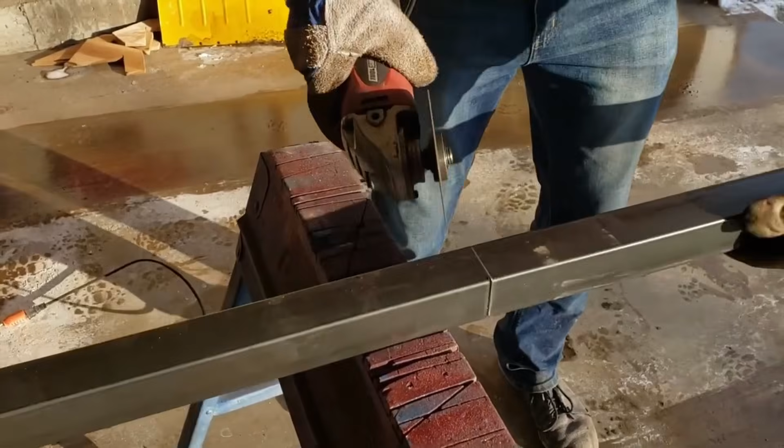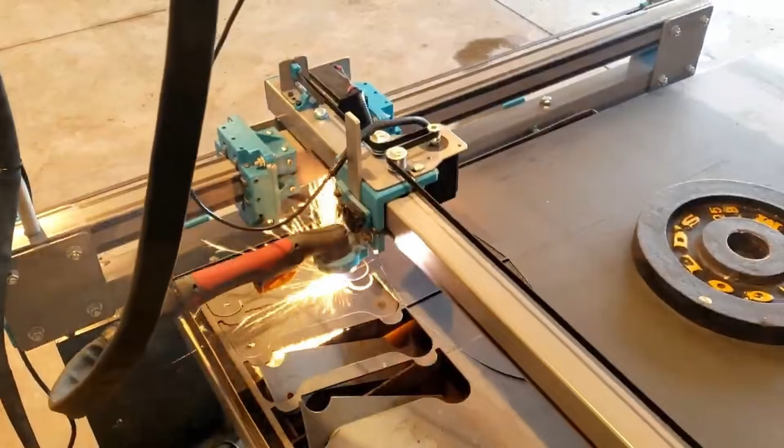These builds are meant to be built at home with simple tools, and any complex parts are taken care of with a 3D printer. We have a variety of different builds that should meet just about anyone's needs. All of our builds can be done for under $1,000, and some of them in the $200 to $300 range.

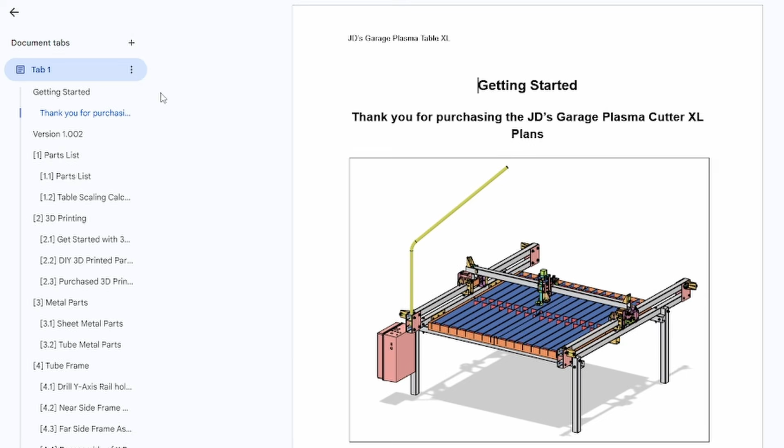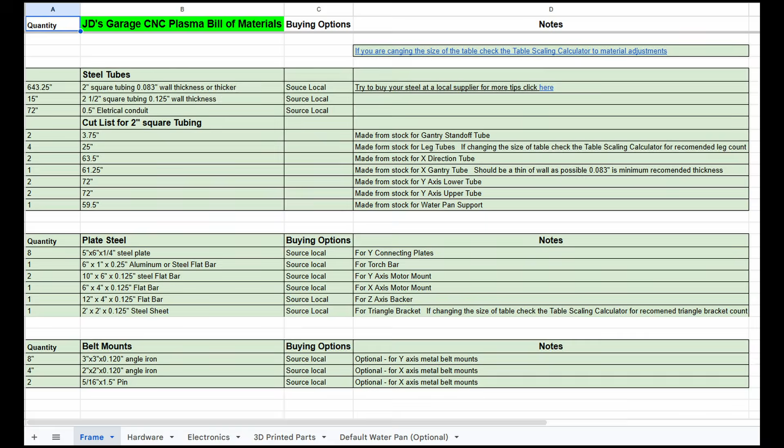With all of our builds, each one has a 100+ page manual that covers everything needed to build a machine. Within this manual, there is a parts list. It contains every single part needed to complete the machine, right down to the last nut, bolt, and washer. There's also engineering drawings for every part that needs to be made by you.

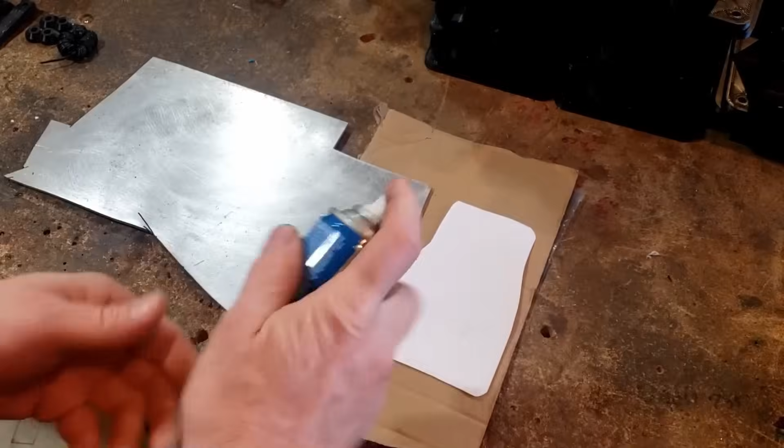Along with this, some parts have a one-to-one printable template that you can print out on paper, attach to the metal for drilling points and cutting dimensions.

The assembly portion of the manual includes pictorial diagrams for every single step and lists each component that is needed to complete that step. All the schematics needed for wiring are included as well.

There's even a wire list that lists the cut length for each wire in the build and which location each end of the wire goes to.

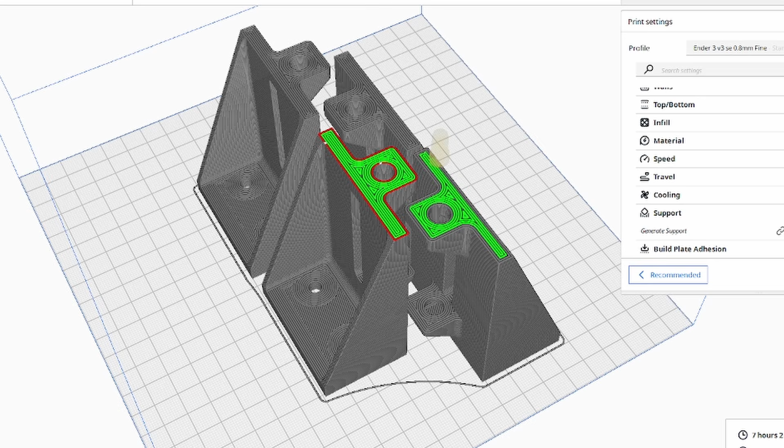For the machines that require 3D printed parts, the STL files are included, and there's even an entire section on testing the machine and running your first job, including how to make the G-code.

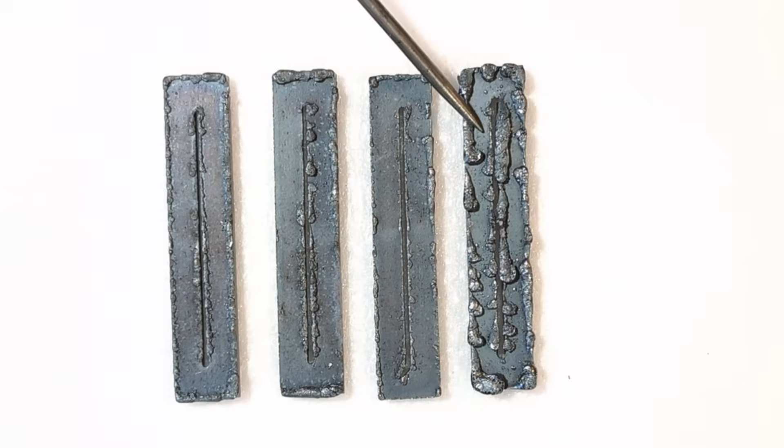Cut tolerance is going to be basically the same with each one of our machines that you choose to build. Cut quality will be more determined by the plasma cutter you choose than the actual machine you build. If you have a good quality plasma cutter and you have the profile set up properly, with any of our CNC machines, you should be able to cut to a tolerance of 0.5 millimeter, no problem.

Currently, we offer 3 different builds. We have the mini platform, the Gen 2, and the XL. We do have detailed build videos on each one of these on our YouTube channel, but we're going to talk about each one of these in detail.

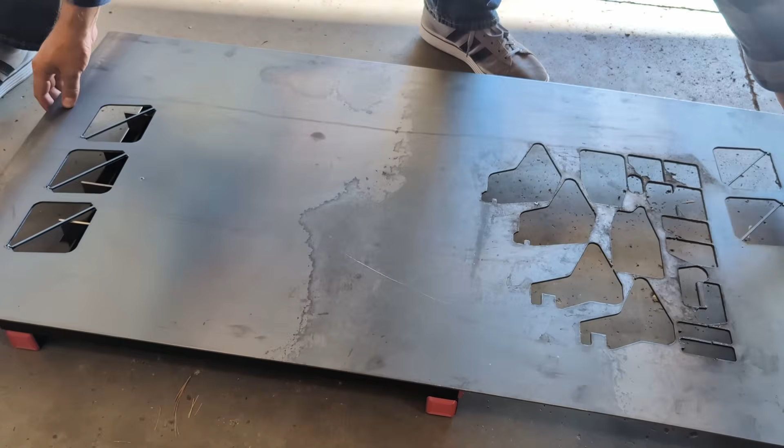First one we're going to discuss is the Mini. The Mini is a 2-axis machine. It's meant to be the simplest and easiest build. The Mini is a small size and it's extremely portable.

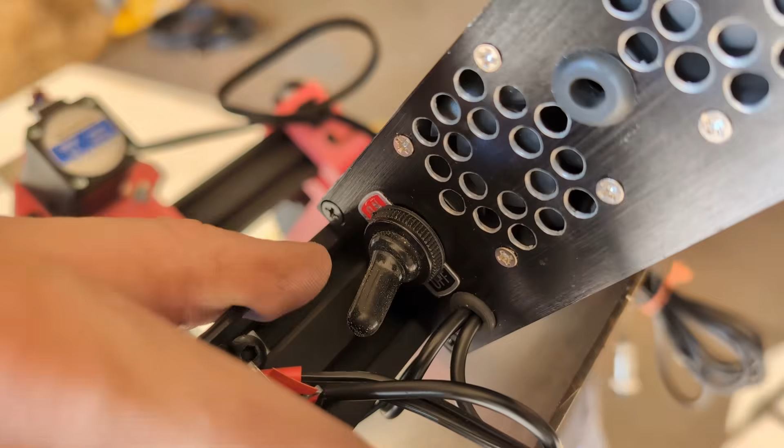You can actually just grab it by one hand, take off, walk with it, and put it away anywhere you want. The Mini also has optional magnetic feet that you can build that will lock the device onto the metal. The Mini also has an optional touchscreen.

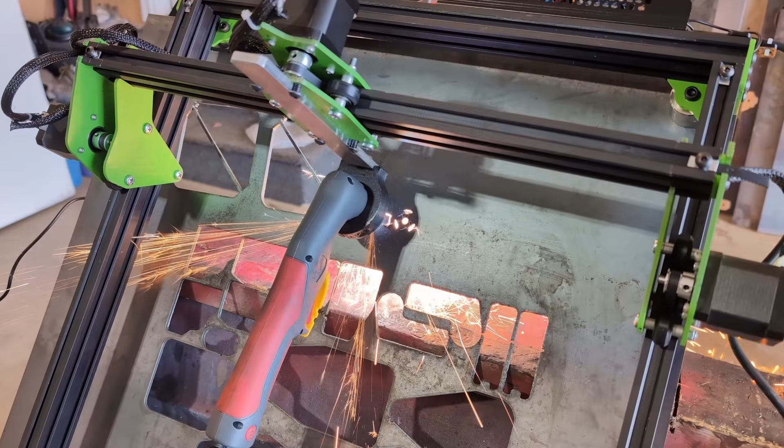With this touchscreen, you can run the machine without using a PC. With the Mini, you can load your jobs into the CNC with an SD card or with a hardwired connection to your PC. With the Mini platform, we currently have a 3D print version and an all-metal version.

We do have a video on trying to determine which one you should build, but the conclusion is, if you have a 3D printer, build the 3D print version. If you do not have a 3D printer, build the mini metal version.

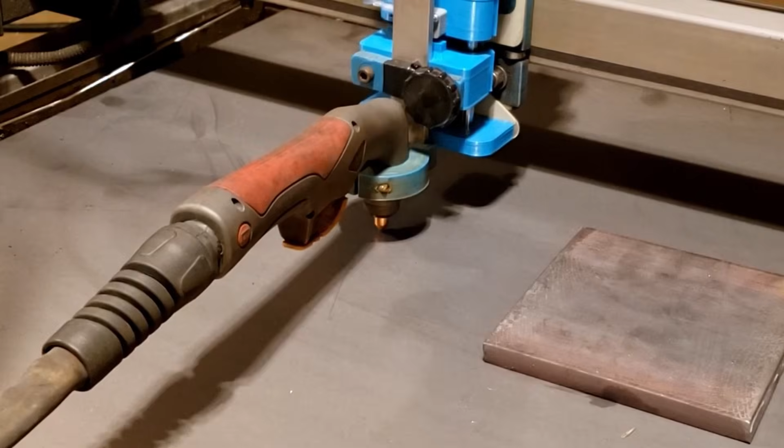Moving on to our second offering, the Gen 2 machine. First, it's flexible. It can be built as a 2-axis or a 3-axis machine by adding the Z-axis. The Gen 2 build is based off of 2-inch by 2-inch square tubing. If you're in a metric country, there's a metric version that's based off of 50 millimeter by 50 millimeter square tubing.

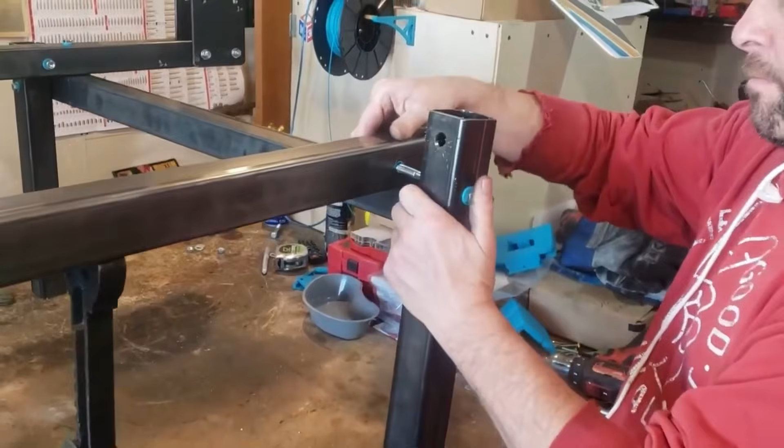Unlike the Mini, the Gen 2 has a traditional base to support the metal while cutting. The Gen 2 also has the option to add a water pan for cleaner operation.

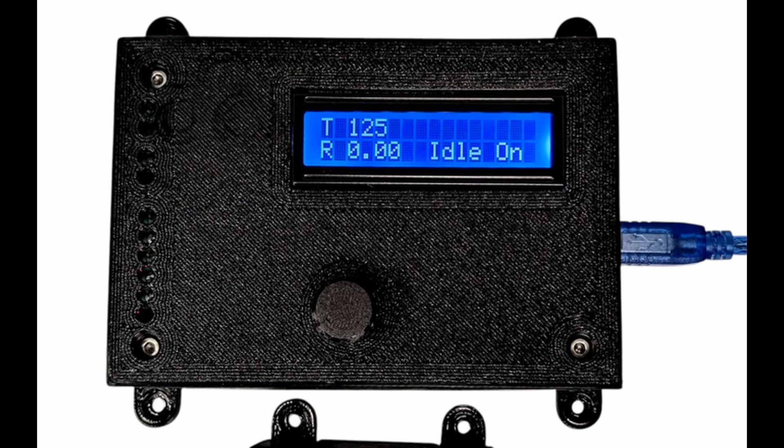Like the Mini, the Gen 2 machine can connect to your computer through a hard wire, or it can connect to your home Wi-Fi. It also has the ability to host its own Wi-Fi that the controller will create. Unlike the Mini, the Gen 2 has the ability to add a torch height controller.

A torch height controller keeps the torch at a constant distance from the metal during the cut to maintain higher cut quality. This can especially be important during long cuts on thin metal that are prone to warpage during the cut.

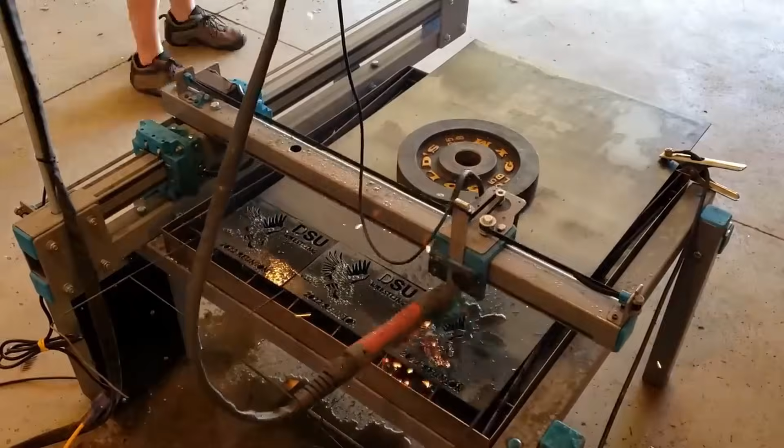The Gen 2 has a cantilevered arm on the X-axis. This cantilever makes loading and unloading of metal very easy.

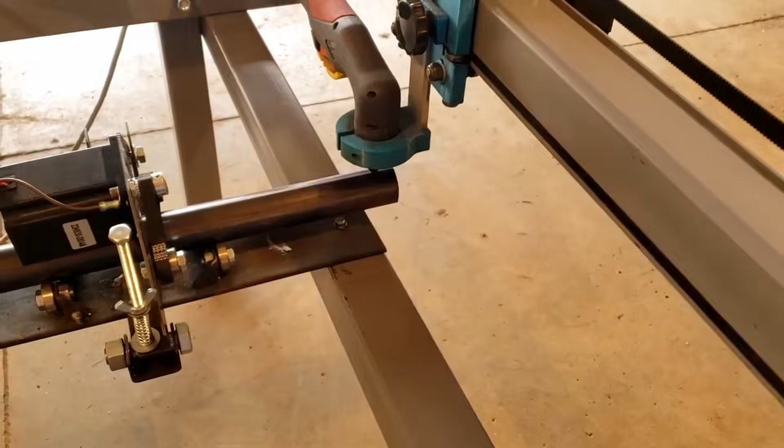The Gen 2 plans also contain an option to build a light-duty rotary axis for tubes up to 2.5 inches. With this rotary axis, you can notch tubing. You can also cut designs into any round surface up to 2.5 inches in diameter.

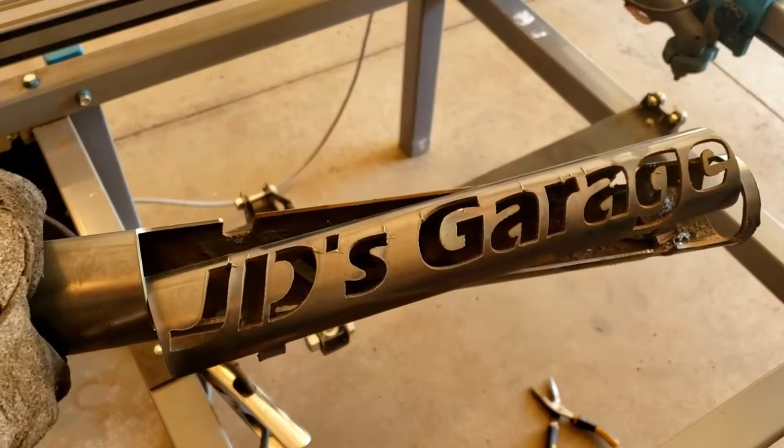Moving on to the XL. The XL is a true workhorse, and this is the one we find ourselves using the most out of all 4 of the machines we have.

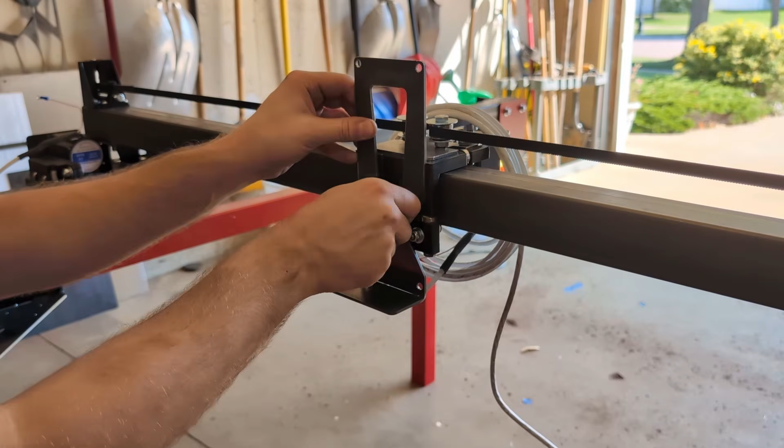The XL machine must be built as a 3-axis machine, the X, Y, and the Z. The XL shares some common features with the Gen 2, like it's based on 2x2 tubing or 50 by 50 millimeter tubing. It connects to your computer the same 3 ways that the Gen 2 does.

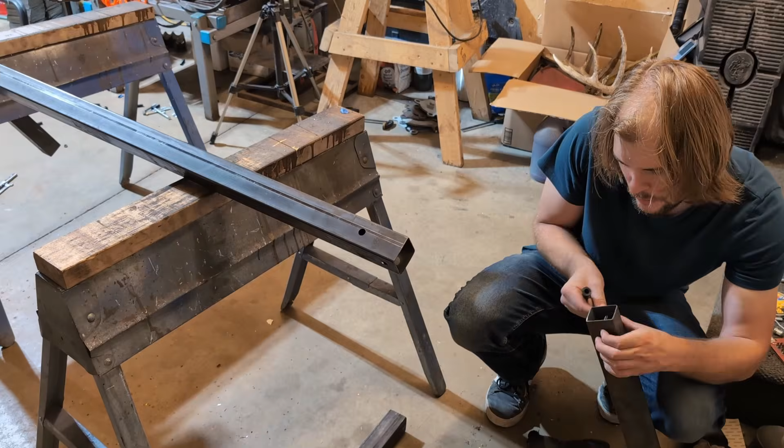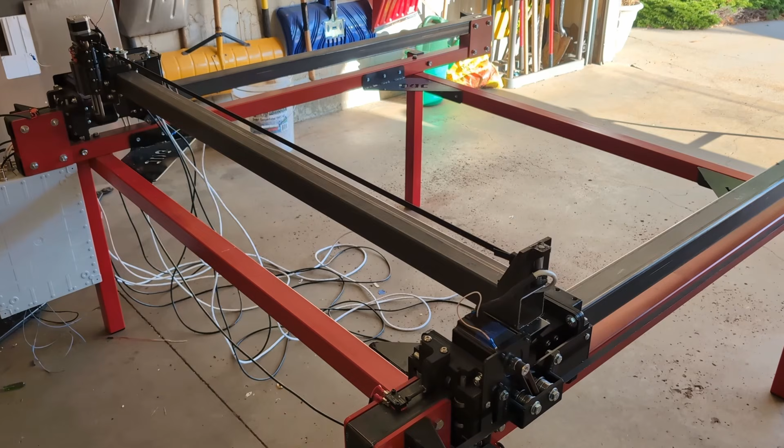It also has the ability to add a torch height controller like the Gen 2. It has a dual supported gantry, and it also has an auto square function that ensures the X-axis is square to the Y-axis on power up.

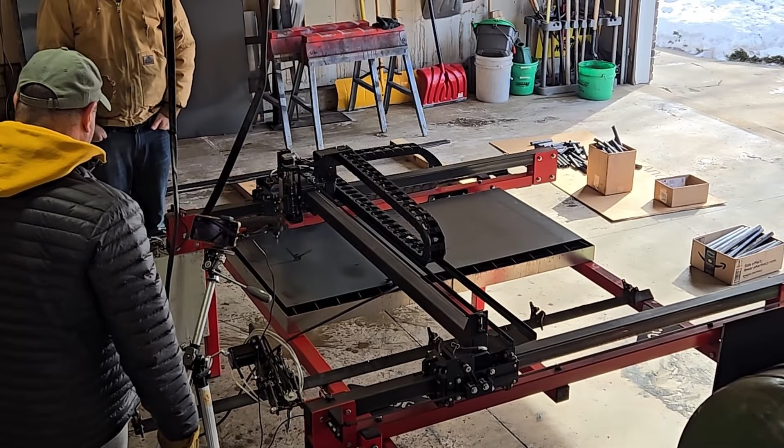The XL also has a flexible build size. It can be built with a cutting surface of 2 feet by 4 feet, all the way up to a cutting surface of 5 feet by 10 feet. As compared to the Gen 2 machine, the XL uses larger drivers and motors to significantly increase the torque of the machine.

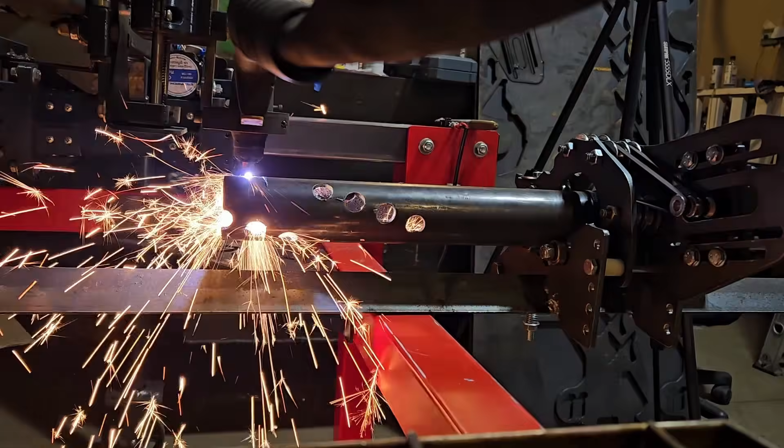Included in the XL plans is a heavy-duty rotary axis. This rotary axis can handle tubing up to 3 inches. With this rotary axis, you can cut tubing to length, notch tubing, put designs on tubing, and perform any other process you'd like on a round surface.

Those were the features of the 3 platforms. Now it's time to talk about the size of each. For most of you, this will be the determining factor on which one you choose to build.

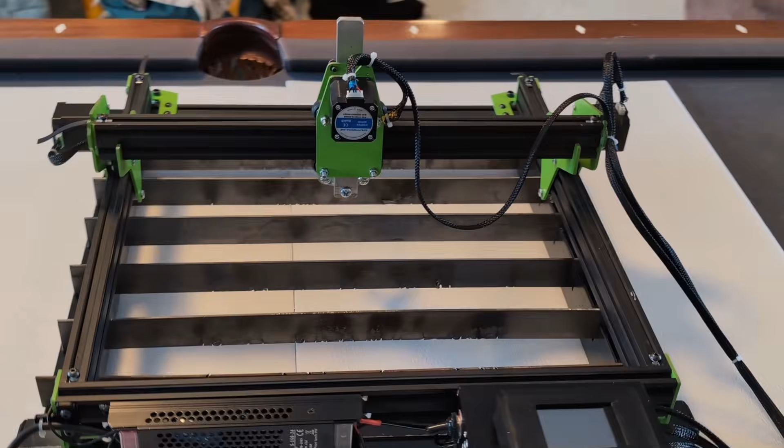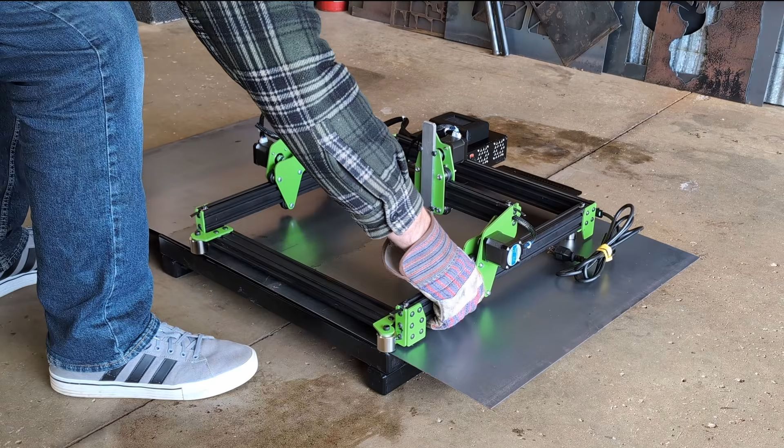First, the Mini. The Mini has a cutting surface of approximately 15 inches by 15 inches. The whole machine's outside dimensions are approximately 26 by 20 inches. The machine is extremely portable, so we don't consider size any factor.

Moving on to the Gen 2. The Gen 2 has a cutting surface of 28 inches by 32 inches. With this cutting size, you need a floor space of 39 inches by 56 inches. So it's not really a very big machine at all.

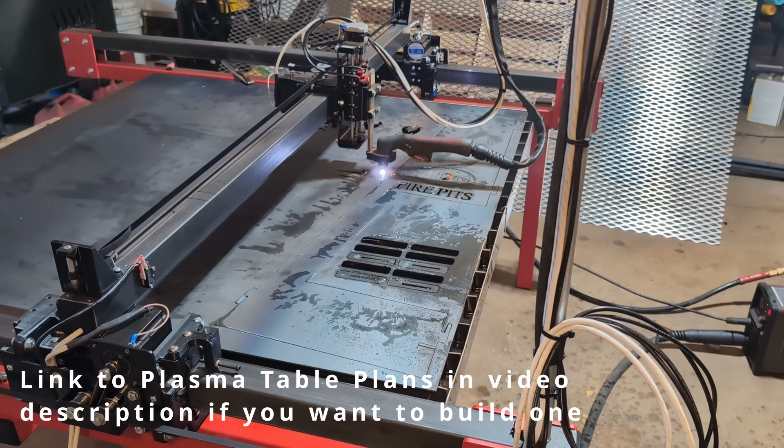The final machine, the XL, has a flexible build size. We built our machine to handle 4 foot by 4 foot sheets. As far as floor space is concerned for the XL, start with the cutting surface you want, add about 21 inches in the Y direction, and add 16 inches in the X direction, and that'll give you your estimated floor space for the XL machine.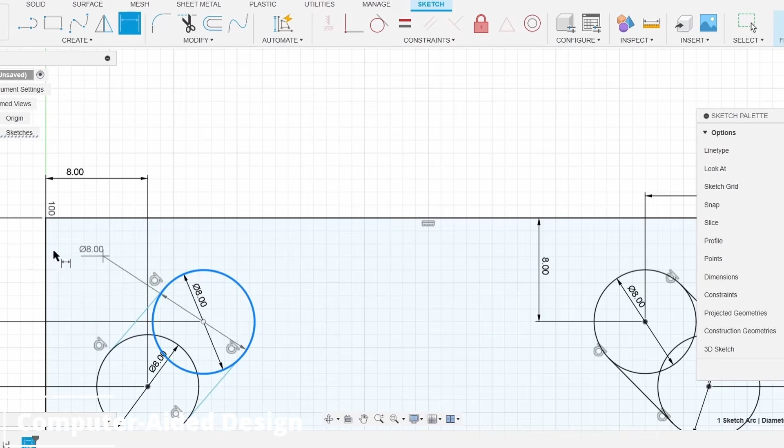Moving on to running the machine. All of the machines basically function exactly the same. You draw your parts, create your G-code, send it to the machine, and cut out your parts. This process is highly detailed in our instruction packages, and we have several videos on our YouTube channel that explain this process.

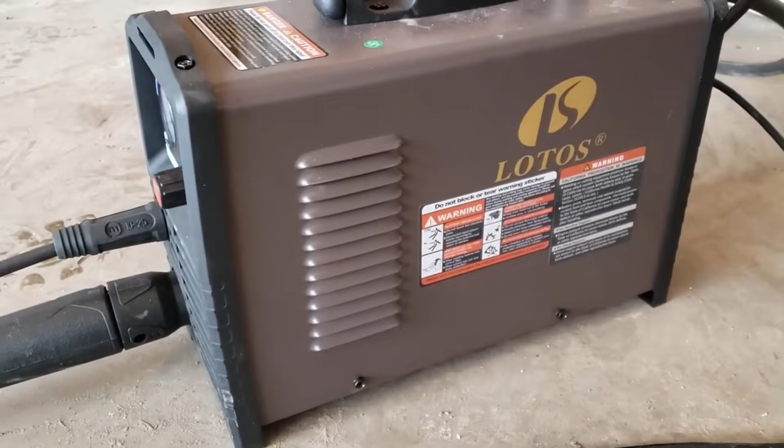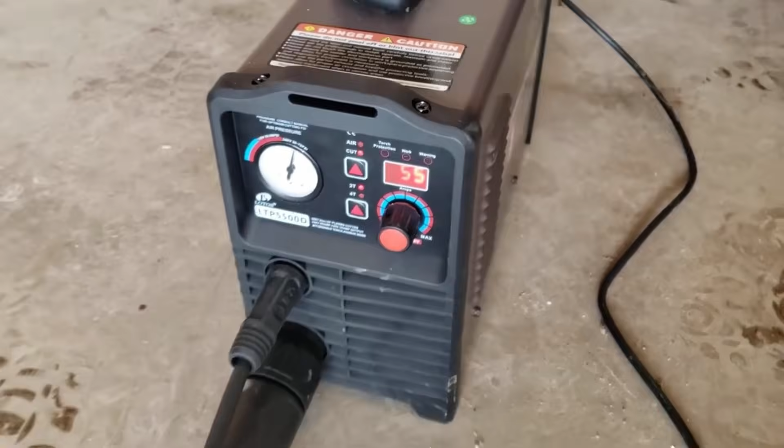Now we have to talk about plasma cutters. All of our CNC builds require a plasma cutter. When we quote the price to build a machine, this does not include the cost of the plasma cutter. All CNC machines, not just JD's Garage machines, require a low frequency, non-high frequency, blowback start style plasma cutter in order to be compatible with a CNC machine.

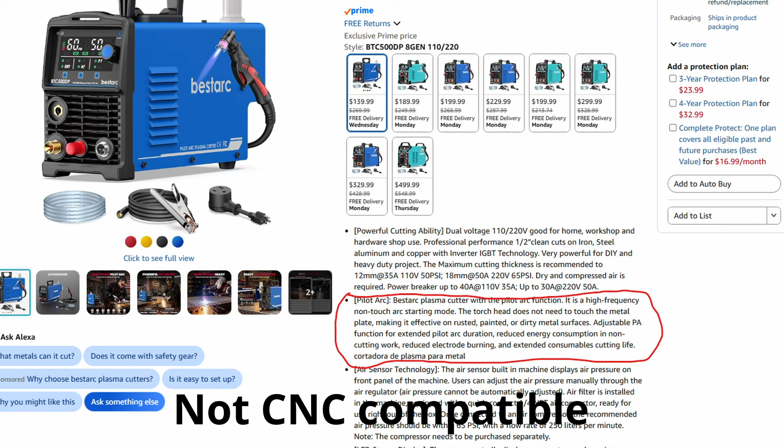One question we get a lot is whether a pilot arc or non-touch machine is compatible. Well, it depends. Not all pilot arc machines are low frequency blowback start. You will need to check the specs in the owner's manual or on the product website for that information.

We do have a list of recommended plasma cutters that are compatible with all of our machines. You can find this list in the description below or on our website. All of these recommended plasma cutters will handle advanced features like adding a torch height controller later on if you decide to. Most of these plasma cutters run in that $350 to $600 range. If you go with the top end, like a Hypertherm, you could be in the thousands of dollars range.

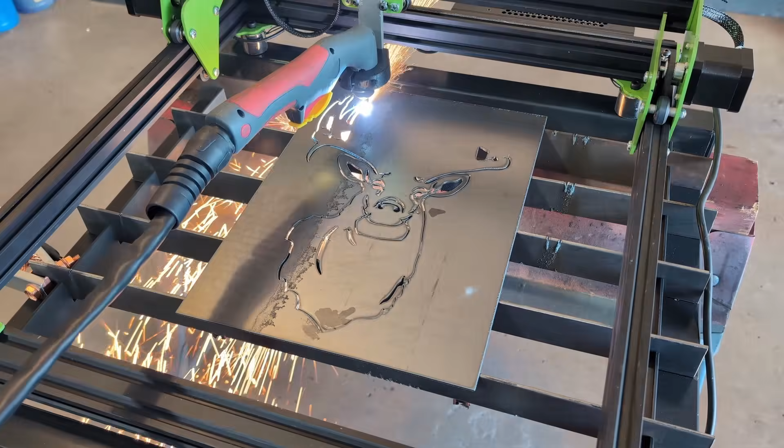For the Mini platform, we have a couple of low budget plasma cutters in the Mini plans. These are not torch height control compatible, as it's not required with the Mini since there's no Z-axis. These budget plasma cutters run approximately in that $200 range, but prices can vary a little bit, both up and down.

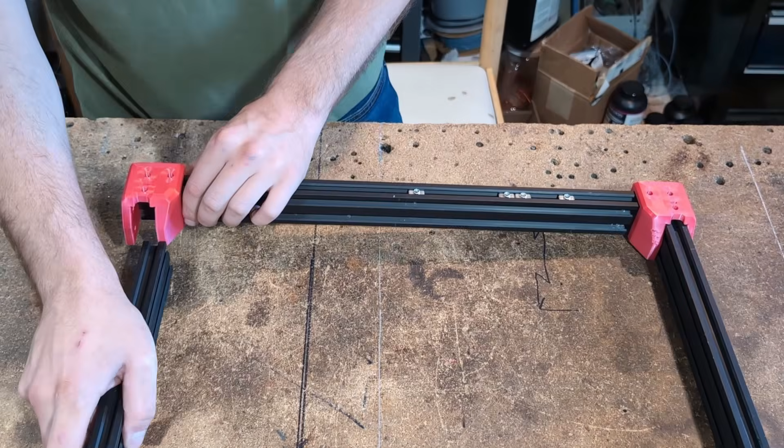Moving on to parts availability. We have had thousands of successful builds all over the world on these 3 platforms. The component parts to build each of these are readily available on sites like Amazon and AliExpress throughout the world.

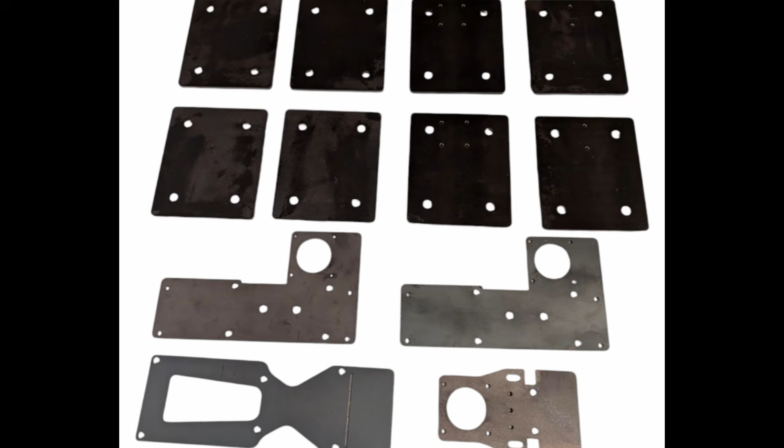Also, on our website, we do offer 3D printed parts for sale for those of you who want to build a Gen 2 or an XL machine but don't have a 3D printer or access to one. We also sell pre-cut metal plates for convenience for all 3 of these platforms. Now, it's not necessary to purchase these parts from us, because all of the information is in the plans to make your own. We just offer them, like I said, for convenience.

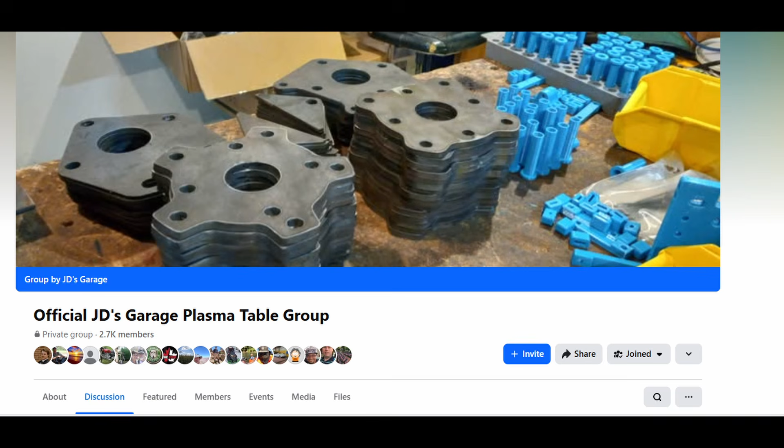So there you have it. There's all the information to make your decision. Now, what should you do?

Well, if you're a guy that's going to need to cut out a part every month or two and it's relatively small, go ahead and build a Mini platform. If you're the guy that has a small shop and you do some fab work for contract, I think you should have an XL. Now, if you're somewhere in between the two, what am I going to say? Well, obviously you should have a Gen 2.